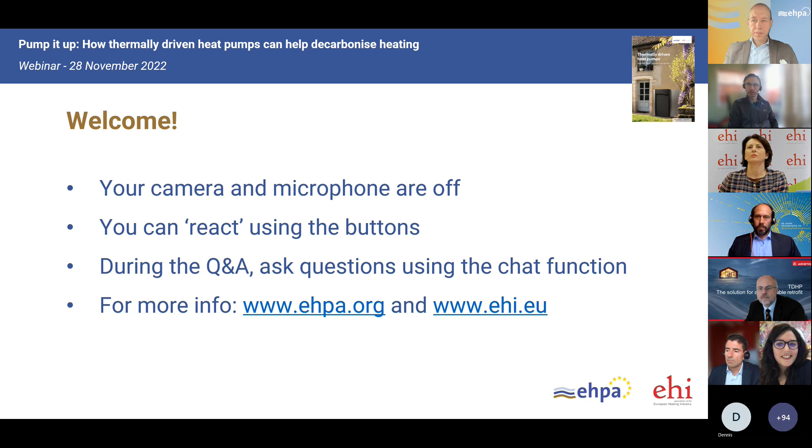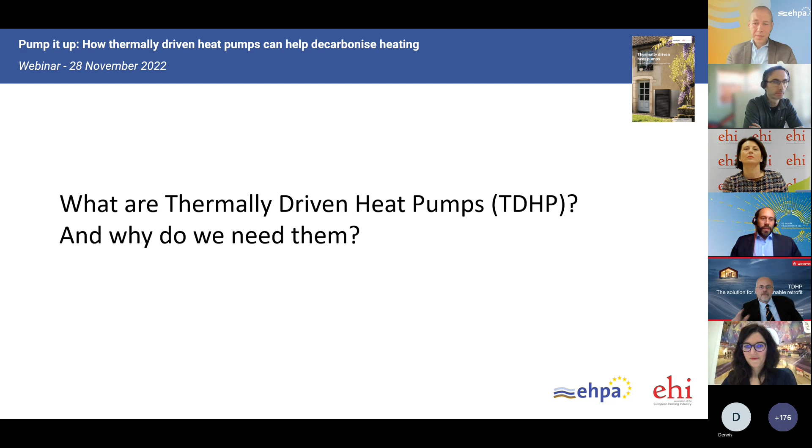Before going to the technology, just some considerations. What are we facing in the future, what is the current situation, and what is the challenge in heating houses, heating homes in Europe? This shows the example of Italy.

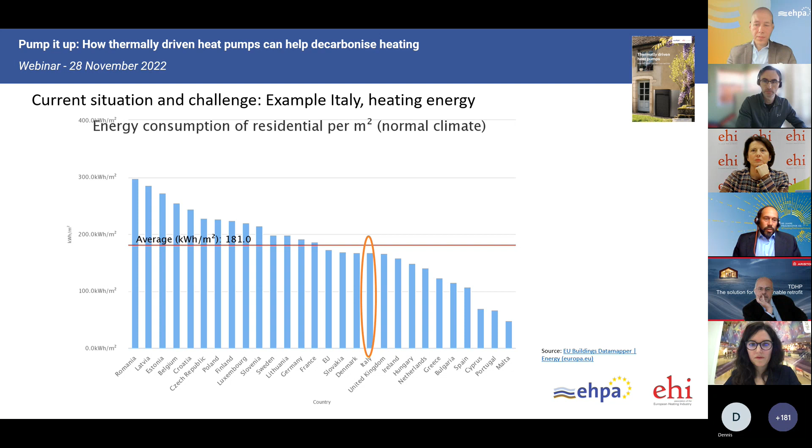The average energy consumption for heating of residential homes, per square meter and year. What you see here, the average is still about 180. Italy, in this case, is a little bit lower. Sure, there is not too much heating need in some parts of Italy, but some parts are still heavily depending, especially on gas heating. And as you can see on the next slide...

Also, the existing buildings situation—and this counts for many European countries—is that many existing houses are not too renovated, not too retrofitted, and still have quite a high energy need for heating. In Italy, it's more than 50% of the buildings that are in category F and G, which are the worst categories for energetic efficiency of buildings. This is a big challenge, and this is what we need to quickly face within Europe to really reduce CO2 emissions quickly.

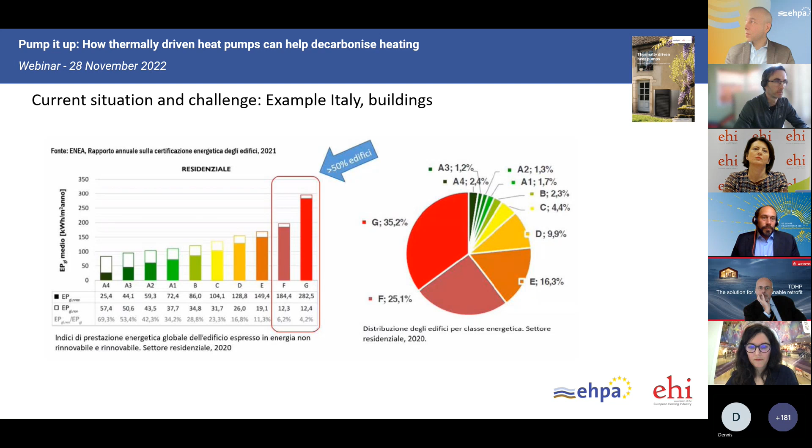Another thing that comes with it is what I already said. Currently, still a lot of energy provision is today done by natural gas. You can see in Italy in '21, it was very obvious that in wintertime you need a lot more energy, specifically gas, in final use—even more if you take the upper blue line. What you also see is that, of course, quite a share of electricity that goes into the buildings is currently still produced by burning gas.

While the energy demand for electricity currently is much lower—and this is basically the same picture for many European countries, for Germany, for the Netherlands, it looks pretty much the same—the big question is, how can we change the heating of our homes, and how can we reduce the energy consumption for doing so?

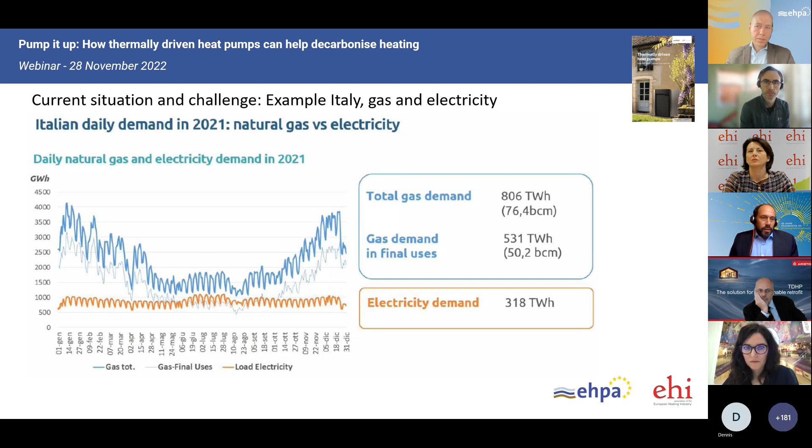And one option that we want to look into here a little bit more in detail is the thermally driven heat pumps. Very roughly, a quick explanation what this means. Typically, when talking about heat pumps, people talk about vapor compression heat pumps. They take mechanical work, which is delivered by electricity that is driving a compressor. They take a lot of renewable heat from the ambient, and they deliver it for heating of homes and also for domestic hot water production at a medium temperature level, which can also be higher, but usually they perform best when the temperature levels stay low.

Actually, the same is the case for thermally driven heat pumps. They also perform best when the temperature levels stay low. But what they do, they have a thermal compressor, basically, and what this is more in detail, we can discuss later. It takes a gas burner, for example, but it can also take other thermal energy that runs this thermal compression cycle. It also takes ambient energy, heat, ground source heat, air, or other ambient heat, and it delivers heating.

The temperature levels that can be delivered with still a decent heat pumping effect are a little bit higher than for the compression heat pumps, for the standard residential compression heat pumps at least. And they don't drop as quickly in efficiency.

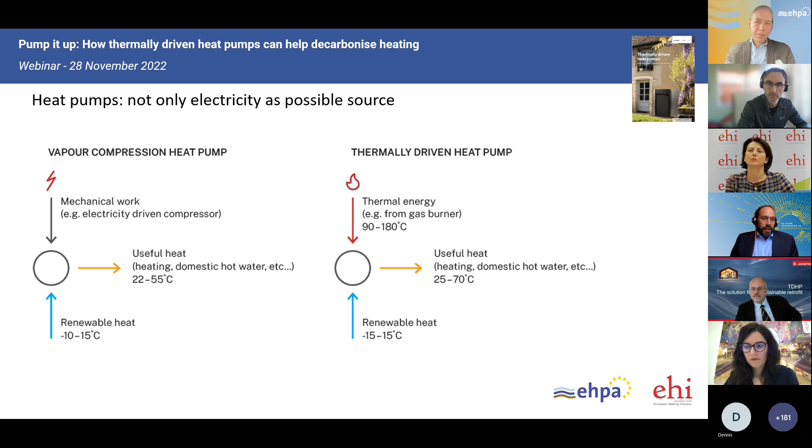Starting from this understanding of this technology, another view on how we heat our homes. We have the typical wall-hung boilers, the gas condensing boilers. They take currently usually natural gas. They run the boiler, they have some losses, and then they more or less deliver maybe 90% of this in form of heat to the building.

A vapor compression heat pump takes electricity from the grid, which can be renewable and will in future be more and more renewable, but currently also is done by coal plants or by gas plants. It's just the typical mix in the grid. In this example, we use the primary energy factor of 2.5, which is, well, an average. It is now being discussed to be lowered for the whole EU, and it differs a lot between maybe 1.5 currently and up to 3.5, depending on country, but also depending on season and on place where you are.

This primary energy is taken, electricity is produced, and from this electricity, you can run the heat pump. Here, a COP of the heat pump of 3.1 is assumed, and you get in this calculation then 125% of the heat you put in on the primary side. And these figures are examples. As said, they can change depending on the boundary conditions.

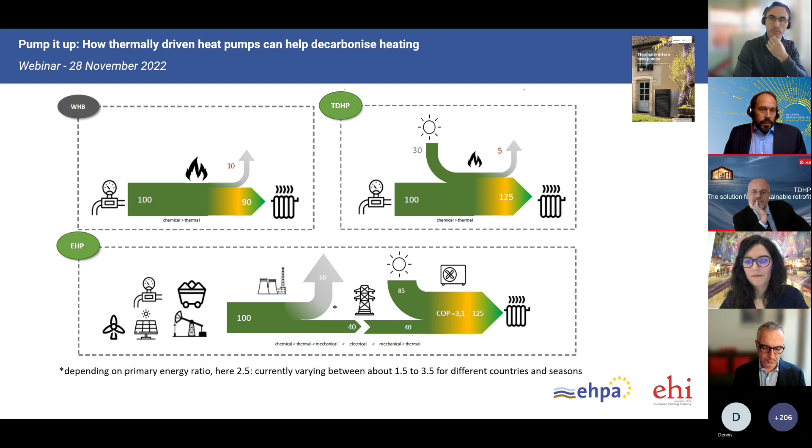There is another typical option also for a sorption heat pump. It's the adsorption process. It's a batch process with solid sorbents, and you, again, for example, have the refrigerant ammonia there. There have been in the past examples for the refrigerant water. They had issues, especially when it came to use of low temperature heat, which is ambient air and which needs to be used also at temperatures below zero.

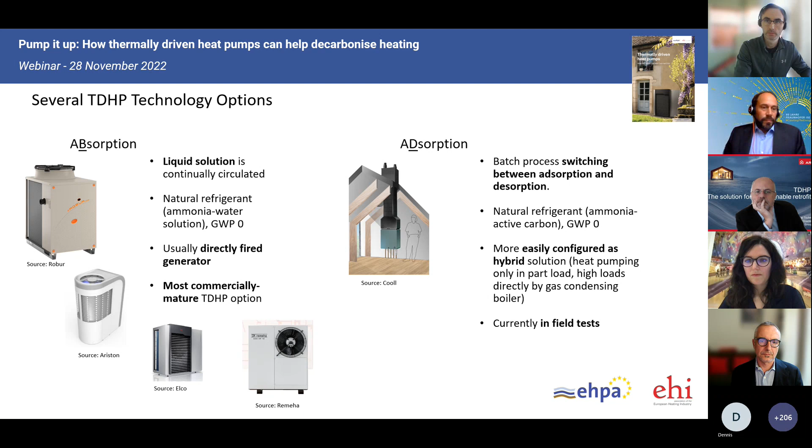There's other technologies for thermally driven heat pumps, which I will not go into more in detail now, both due to time restrictions, but also because they play less a role for residential heating. This is the gas engine heat pumps. They basically use a gas engine that runs a vapor compression cycle. It is also a thermally driven heat pump, but as said, usually more used in industrial applications or for cooling, which we will not dive into at this point.

What are the challenges for this technology? It's basically similar as for the electrical heat pumps. For example, that you need a space for an outdoor unit, either for the full heat pump or getting the ambient air. And there might be regulations around the use of the refrigerants, for ammonia especially there are some regulations.

It is definitely the case that these options, since in addition to any type of combustion system they have the heat pump system, the form factor or the footprint is larger than competing options, and thus related also the costs are usually higher than for a gas condensing boiler, at least.

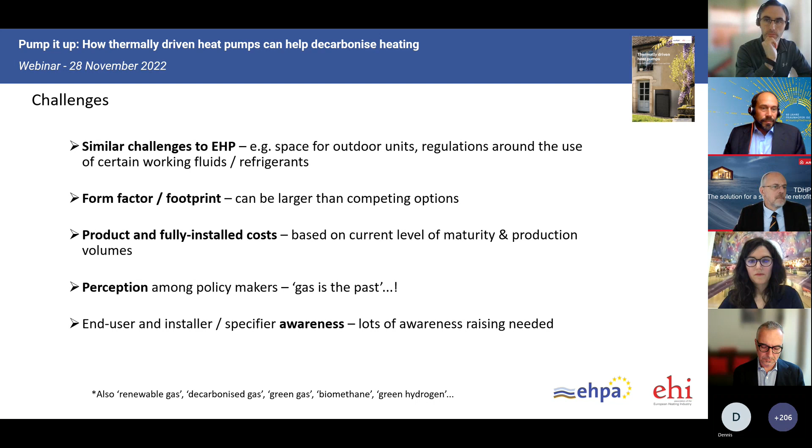And another thing that we might also tackle with this workshop a little bit is the awareness of this technology. Installers, end users, policymakers do not really know this technology, and this also is a challenge. It is key that these technologies provide a certain flexibility and, as said previously, that they can tackle the big issue of retrofit of existing buildings, of reducing primary energy consumption of existing buildings.

So, and that is, let's say, a little personal view. We would say that they quite intimately link efficient technologies of a condensing boiler and a heat pump cycle, which is the big difference to a typical hybrid heat pump, which has one gas condensing boiler and the compression heat pump next to it. It is really one appliance that basically in all operation points does a certain heat pumping.

They are suitable for typical high temperature heating systems, quite abundant within many European countries. Typical radiator heating systems needing supply temperatures of 55, 60, or even more degrees Celsius at low ambient temperatures. They reduce the use of fuel by, for example, 30 to 40% compared to a condensing boiler. And they do this by adding renewable energy by heat pumping.

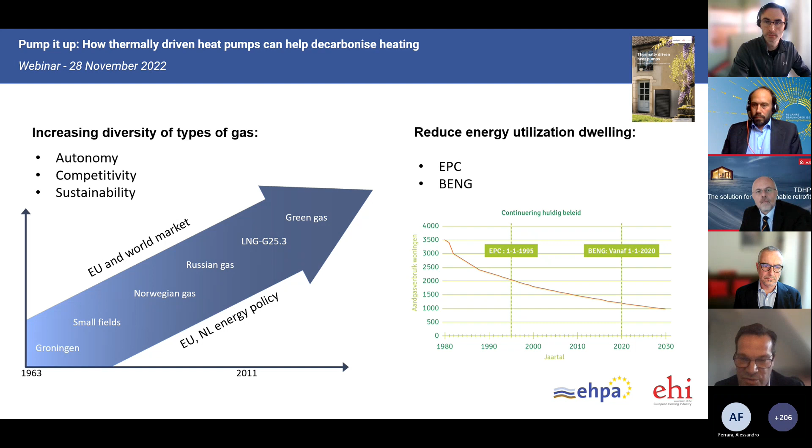So this is our starting point. So we have a lot of gas in the Netherlands. We're fully dependent on gas, and we're making a shift towards more green gases and also stopping with gas, to be clear. So let's see on the next slide. I can take the control. Yeah. So let's see what is happening on the next slide, how we are developing the policy in the Netherlands.

So in 2016, we made a new agenda, which is about energy and how we want to treat energy in the Netherlands. And we look at several things, to be clear. We're looking at our industry, our dwellings, how we produce energy, and we make a program for this. And the policy of the Netherlands is always reducing CO2. So no selection for, let's say, the way we want to make the solutions, but only aiming at reducing CO2, to be clear. That's always the ground of our policy.

But in the end, when we had an earthquake in Groningen, the policy changed more quickly. So we want to stop with gas production. So we changed the legislation in 2018, which means we cannot connect gas anymore in newly built houses. So this gas connection was lost. So all newly built houses are now connected to district heating or mainly electrically driven heat pumps. And it is easy to do because the buildings and the infrastructure are prepared for this new build. So I see it as a good solution to stop with gas if we don't want to use gas, to be clear.

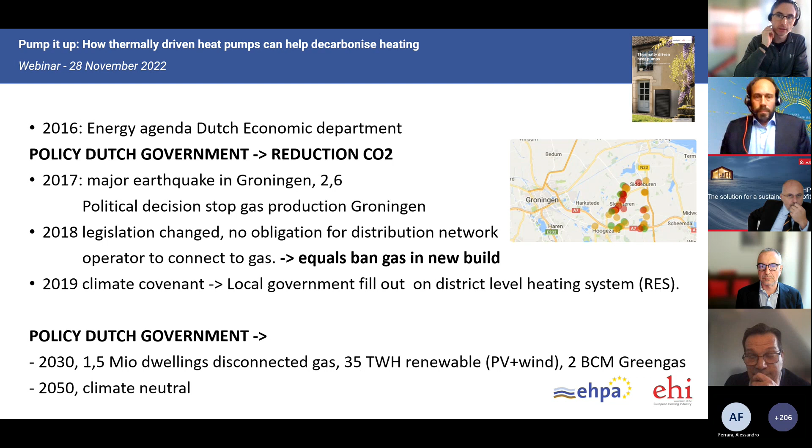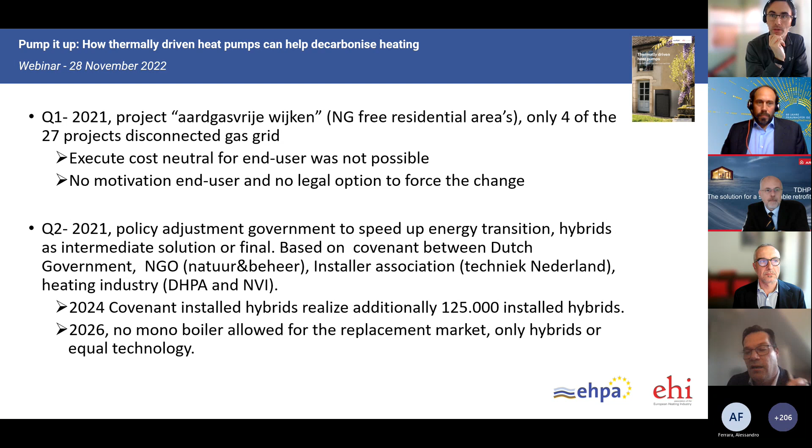Okay. Thank you. Okay, maybe to make it clear, we started working on the programs to disconnect buildings from the gas grid. What happened there is when we got the experience, it was hard to disconnect from the grid. We ran into problems like the costs were too high for the customers, but what we also saw is that there was not always sufficient support for this. So our government changed their approach, and they said we want to do it better, and they added hybrid heating systems into the parameters.

So this means for the future, if we're looking at efficient heating installations to meet the targets, we want to introduce district heating, all electric, but also hybrid heating systems. And why hybrid heating systems? Because they are in balance with our energy structure. So we have the selection: can we go all electric if the dwelling is applicable for this? Or when we need more thermal heat, do we select hybrid heating systems? And hybrid heating systems can be thermally driven heat pumps, but also a hybrid heating system like a heat pump together with a gas condensing boiler.

And I think one of the conclusions and one of the points we are at now is that we want to stop with the mono boiler in 2026, and that we want to offer these efficient solutions in the Netherlands market, so that we roll out hybrid heating solutions. So my conclusion, Stephen: is there a future for hybrids or thermally driven heat pumps? Yes, there is, because they can utilize the green gas which we will produce in the future, and will be a good solution to speed up the energy transition in the Netherlands.

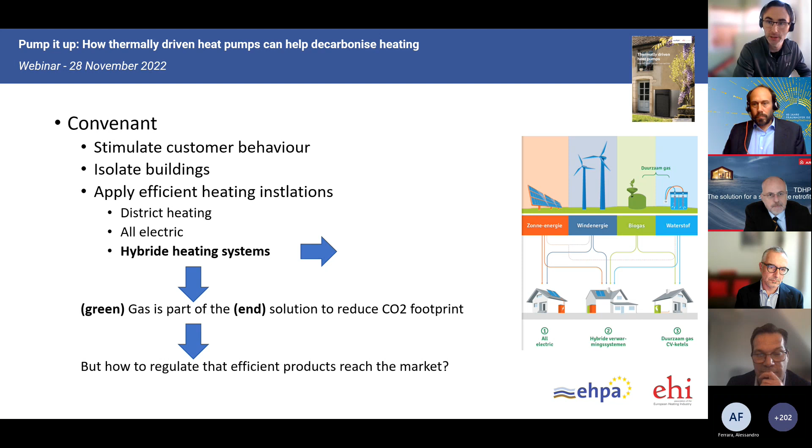But our last but by no means least speaker is Luigi Tischer from Ariston. Luigi is R&D Senior Director at Ariston, and Luigi, my first question for you is: you've spent a lot of years developing Ariston's product, which we saw on Gideon's slides. What's your elevator pitch for the product? Why do you feel there's a role for it in the future of heating?

Thank you for the question. I believe there are several different reasons why thermally driven heat pumps should be successful in their introduction to the European market in particular. Most of these apply to the entire category of thermally driven heat pumps. I will try to consider the benefits for the different elements of the value chain, or the different stakeholders. In particular, end users will be running an appliance or a system which will allow them to reduce gas consumption by 30 to 40%. This is real money saving, not only energy saving.

And this in many countries has an important meaning, in particular when we consider that the energy price is expected at a minimum not to decrease, but very likely to increase compared to the pre-Ukrainian times. Second, the ease of installation. We mentioned the ability of not redoing the emission system, which is not negligible. Being able to reduce the consumption of a building while adopting the same radiators is quite an important asset.

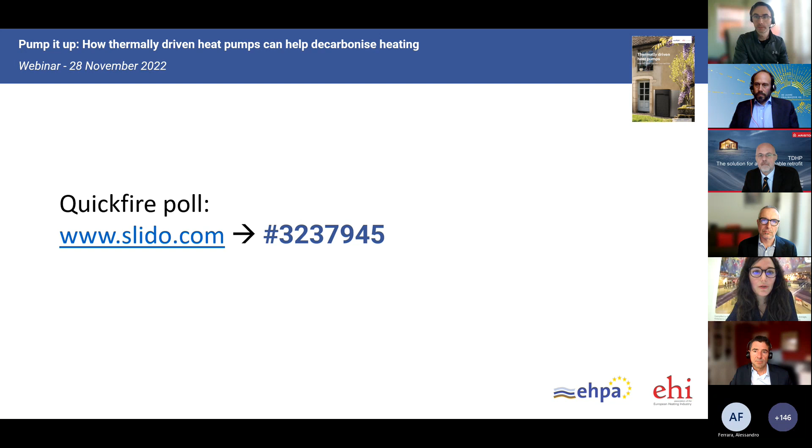The second question that we had for you was, what can we do better so that the TDHP, the thermally-driven heat pumps, sorry, the acronyms, are better known? And I hope that you can access this question now. Here it's more to receive some feedback from yourself on how we can improve our communication around thermally driven heat pumps. And while you reply to this question, I think we can have the final remarks and statements. I'll let you, Steve, take over again and give the floor to our panelists.

Well, yeah, I think I covered it from my side. I think it was a really informative discussion, hopefully, and we touched on the family of heat pump technologies. Let's work back through our speakers. Coming to you first, Eric, is there any succinct final point you'd like to make, and then we'll come to you, Andreas?

Hello? You're on mute. Oh, I think you're still on mute, Eric. Sorry. No, no specific point to be made now. No problem. Andreas, anything from yourself? No, that's okay. I'm happy with your input.

Gideon, from the Dutch perspective or the technological perspective? No special remarks, but I see that everybody's struggling a little bit with the same problems of balancing energy in the grid and trying to make the green path which is in front of us. So it was interesting to discuss today. Okay, thank you. Mario, if you're still with us, Mario?

Yeah. I'm actually fine with what we have been saying by now. I heard what Luigi was saying about the European industry, and I think there is something that as Europeans we should deepen in a discussion, probably not here, about the ownership that we could have in a future heating market which is deeply electrified. There are other industrial players in the world, not of the heating market but of nearby markets, that got a dimension at least one order of magnitude higher than our heating champions.